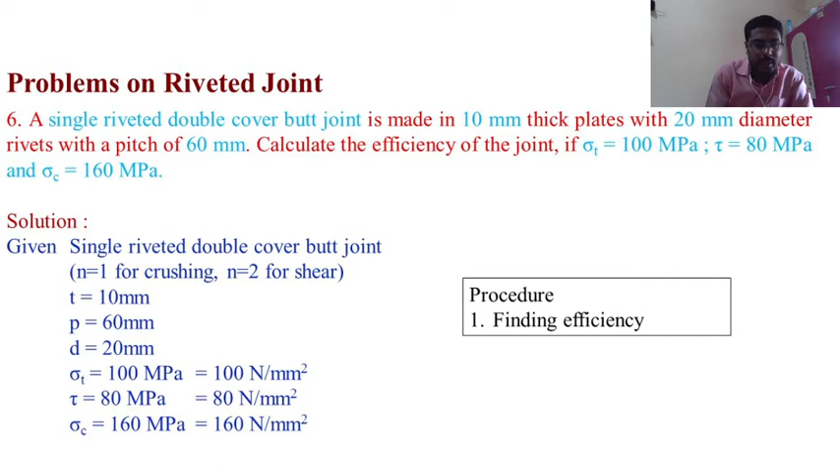So first we find the tearing strength of the joint considering the plate. The equation of the tearing strength is P of T is equal to (P minus D) into thickness into sigma T. This is equation number 5.6b, page 80. So from the data handbook we collected the formula. Substitute all the values to find the tearing strength. Then P of T is equal to (60 minus 20) into 10 into 100. So P of T is equal to 40 into 10 raised to power 3 newtons. So round up the answers. The tearing strength of the joint is P of T equal to 40 into 10 raised to power 3 newtons.

Next we go for the second one, the shearing strength of the rivets. Shearing strength formula: P of S is equal to n into pi by 4 d square into shear stress tau, equation number 5.6d, page number 80 from the data handbook. Note down the equation. Then substitute the values and find the answer. P of S is equal to 2 into pi by 4 into 20 square into 80, equal to 50.26 into 10 raised to power 3 newtons. This is the shearing strength of the rivets.

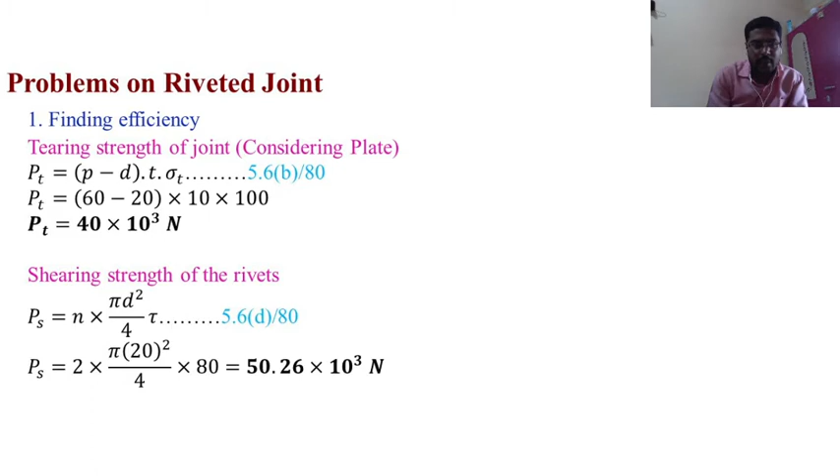Okay, then we finally find the efficiency of the joint. The efficiency of the joint uses the least value among these three values. PT is equal to 40 into 10 raised to power 3, PS is equal to 50.26 into 10 raised to power 3, and the third value is 32 into 10 raised to power 3. So among these three values, which one is least? PC, the crushing strength value, is the least. Therefore we take that into account.

So 32 into 10 raised to power 3 newtons divided by solid strength of the plate, which is 60 into 10 raised to power 3. So 32 into 10 raised to power 3 divided by 60 into 10 raised to power 3 is equal to 0.5333. Into 100, we get the efficiency as 53.33 percentage. So we finally get the efficiency of the joint is 53.33 percent. So this is the solution of this problem.

So if any doubts, any changes, any clarification, please let me know. Otherwise we will go for the next problem.

So problem number 7. Carefully read and listen: what problem is given, what values we get and what we need to find. A double riveted double cover butt joint is made in 12 mm thick plates with 18 mm diameter rivets. Find the efficiency of the joint for a pitch of 80 mm if sigma t is equal to 115 megapascal, shear stress tau is equal to 80 megapascal and crushing strength is equal to 160 megapascal. This is the given problem.

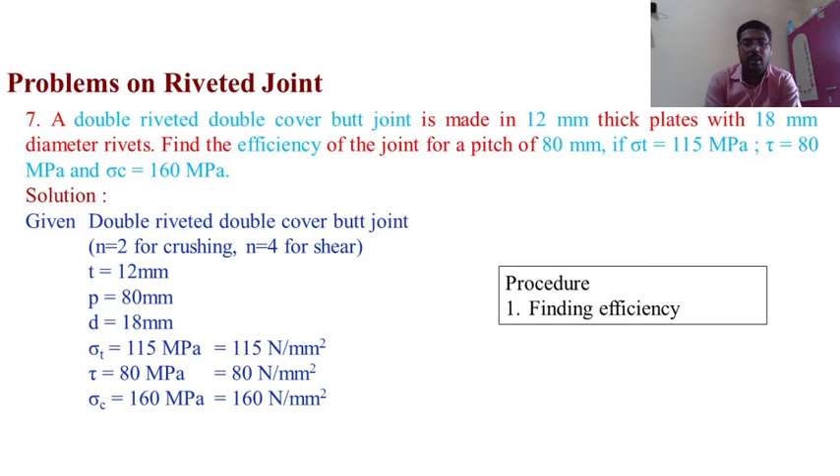So next, write down the given data. Double riveted double cover butt joint: n is equal to 2 for crushing, and n is equal to 4 for shear strength. Thickness of the plate is 12 mm, pitch of the rivet is 80 mm, and diameter of the rivet is 18 mm. Tearing strength is 115 megapascal, equal to 115 newton per mm square. Shear stress is 80 megapascal, 80 newton per mm square. Crushing strength is 160 megapascal, or 160 newton per mm square. This is the given data. We go to find the solutions.

So first, we find the tearing strength of the joint considering the plate. Pt is equal to p minus d into thickness into sigma t. This is equation number 5.6b, page 80, taken from the data handbook. Pt is equal to p minus d into t into sigma t. Then we substitute all the values to find the tearing strength.

Then P of T is equal to: pitch of the rivet is equal to 80, minus diameter of the rivet is equal to 18, into thickness of the plate is 12, into tearing strength is equal to 115. Substitute all the values in this equation and find the value. Then P of T is equal to (80 minus 18) into 12 into 115. Then P of T is equal to 85.56 into 10 raised to power 3 newtons. Round off these answers. This is the value of tearing strength of the plate.

Okay. Next, we go for shearing strength of the rivets. So P of S is equal to N into pi by 4 D square into shear stress tau. So this is the equation 5.6D bar, page number 80 from the data handbook. So write down the equation. Then P of S is equal to N into pi by 4 into D square into tau. So substitute all the values here and find the shearing strength.

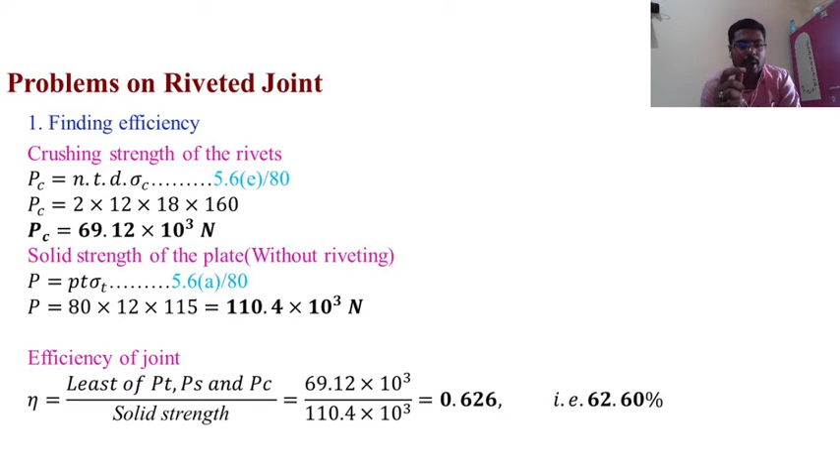Then PC is equal to the formula, then substitute the values. So N is equal to 2, the thickness of plate is 12, and the diameter of the rivet is equal to 18. Sigma C is equal to 160. So therefore all the values substitute: 2 into 12 into 18 into 160. Then PC value is equal to 69.12 into 10 raised to power 3 newtons. This is the crushing strength of the rivets. Round off this answer.

Okay, these are all the three values we get. First one is tearing strength, second one is shearing strength, third one is crushing strength. So all these values we get, and finally find the solid strength of the plate. The solid strength of the plate is without riveting. Therefore formula P is equal to pitch of the rivet into thickness into sigma T. The equation number 5.6a bar, page number 80. So from the data handbook this equation is available. Then we can write down the equation and substitute all the values.

Then P is equal to: pitch of the rivet is equal to 80, thickness of the plate is equal to 12, and sigma T, tensile strength, is equal to 115. Therefore substitute all the values: 80 into 12 into 115. Therefore solid strength of the plate is equal to 110.4 into 10 raised to power 3 newtons. This is the solid strength of the plate without riveting.

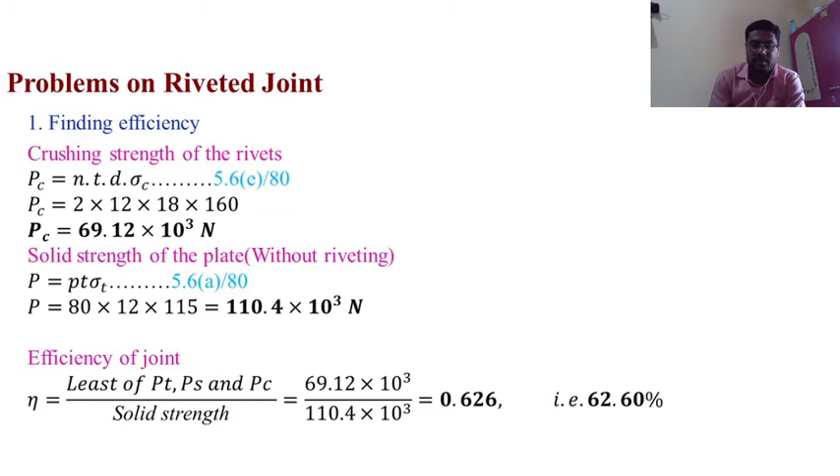So if you have any doubt, ask. Crushing strength, shearing strength, tearing strength, solid strength. If any doubt, you can ask directly, and we will go for the session for MCQ, multiple choice questions. Okay.

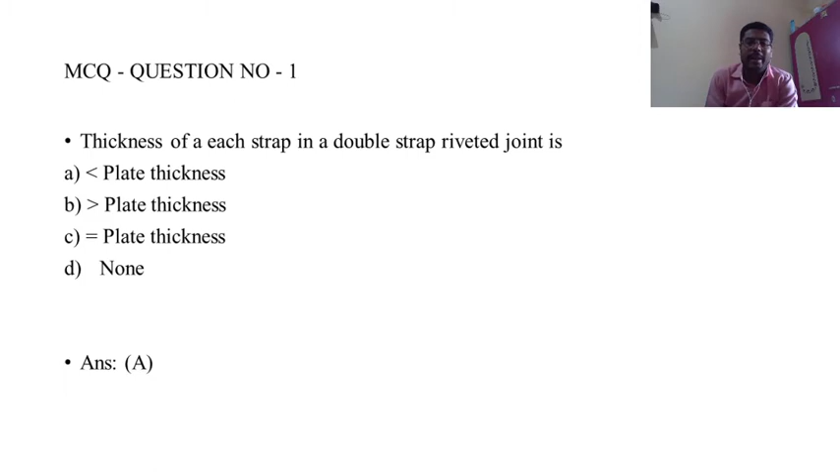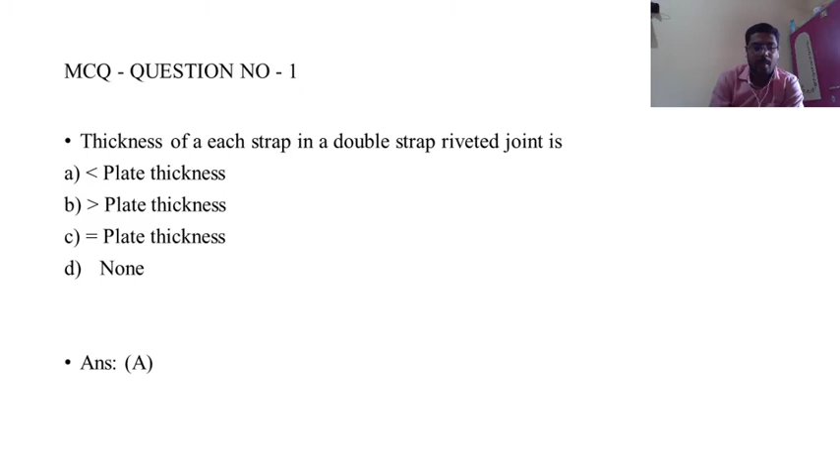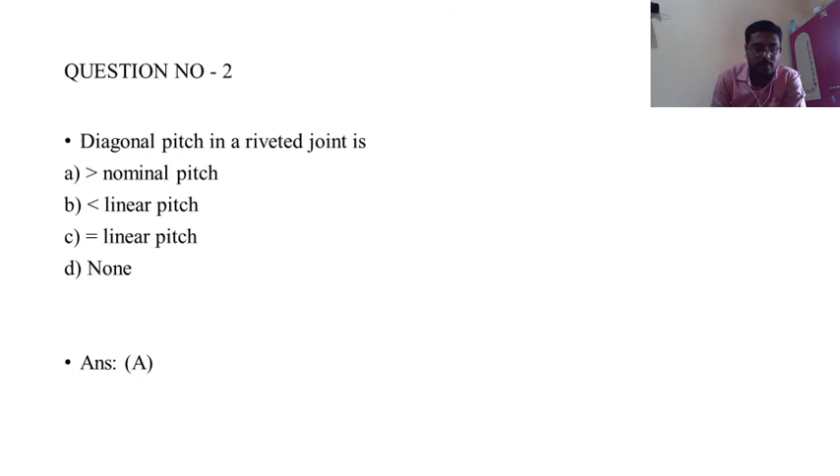Question number 4: Margin in a riveted joint is equal to... I will repeat the question. Margin in a riveted joint is equal to: option A, D; option B, 5 times D; option C, 2 times D; option D, none of the above. Again I will repeat the options. Option A, D; option B, 5 times D; option C, 2 times D; option D, none of the above. So the correct answer is option A, the diameter. Okay, this is the correct answer. So we will go for the next question.

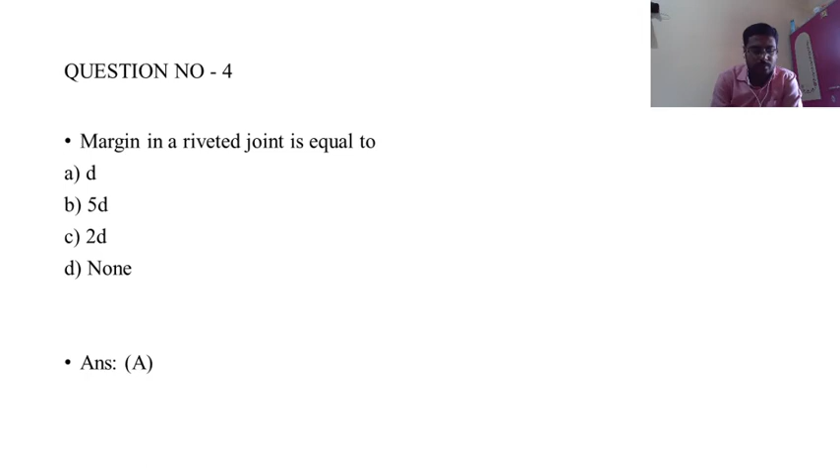So question number 5. Carefully understand the question. Marginal distance in a riveted joint is equal to: option A, 1.3 times D; option B, 1.5 times D; option C, 1.2 times D; and option D, none of the above. Question number 5, so observe carefully. The marginal distance in a riveted joint is equal to: A, 1.3 times D; B, 1.5 times D; C, 1.2 times D; D, none of the above. So answer your questions.

So the answer is option B. Option B is the correct answer. The marginal distance in a riveted joint is equal to 1.5 times D. This is the correct answer.

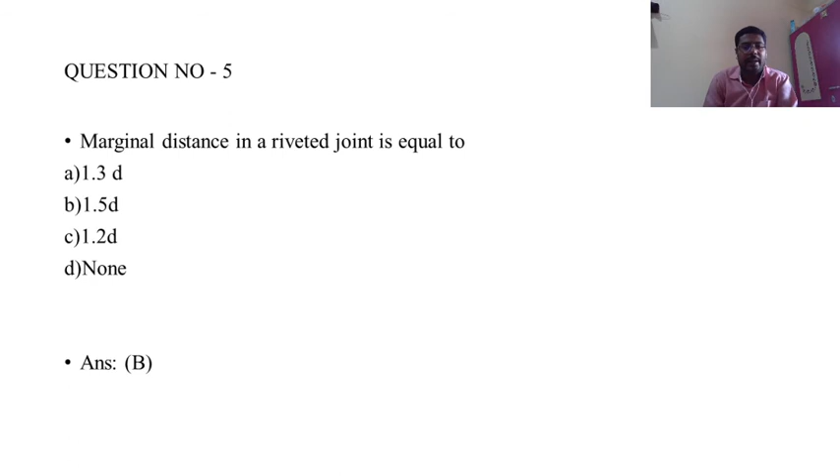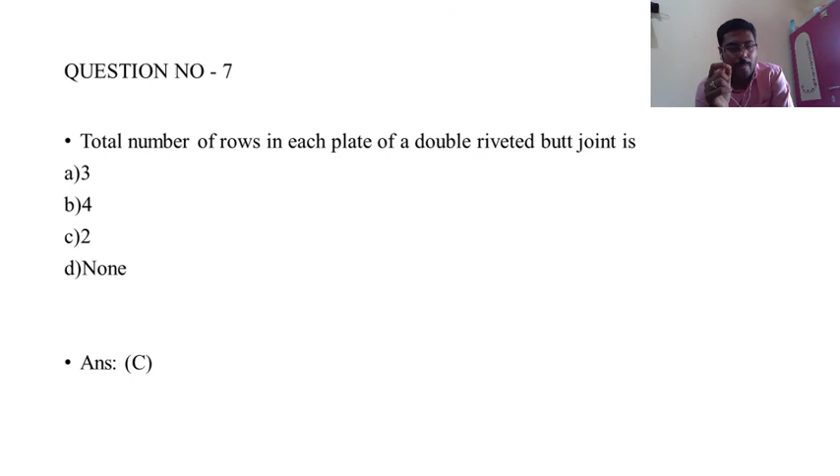The total number of rows in each plate of a double riveted butt joint is. This is the double riveted butt joint. So your correct answer is 2. Option C, the correct answer is 2.

So question number 8. I will read this question. The number of rows in both the main plates of a quadruple riveted butt joint is. Read this question again. Number of rows in both the main plates of a quadruple riveted butt joint is. Option A 4, option B 6, option C 8, option D none of the above. So choose your correct answer.

Number of rows in both the main plates of a quadruple riveted butt joint is. Option A 4, option B 6, option C 8, and option D none of the above. So your correct answer is option C. This is 8. So we will go for the next question.

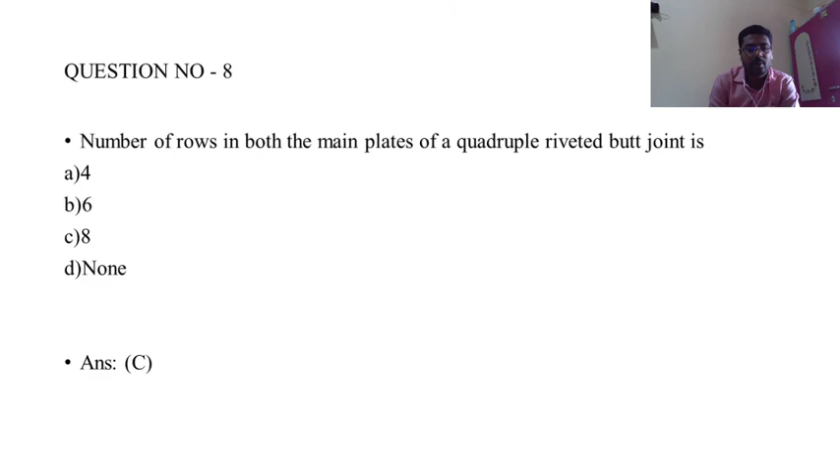Question number 9. In a butt joint, when one strap is used, its thickness varies between dash to dash, where T is the thickness of the plate to be connected. So this is the question.

Option A T to 1.125 T, option B 0.7 T to 0.8 T, option C 0.5 T to 1 T, and option D T to 1.5 T. So choose your correct answer.

In a butt joint, when one strap is used, the thickness varies between dash to dash, where T is the thickness of the plate to be connected. So your correct answer is A. When one strap is used, the thickness varies between T to 1.125 T. This is the correct answer.

So question number 10, this is the last question. If the tearing efficiency of a riveted joint is 50%, then the ratio of the diameter of the rivet hole to the pitch of the rivet is: option A 0.20, option B 0.30, option C 0.50, option D 0.60. So choose your correct answer.

If the tearing efficiency of a riveted joint is 50%, then the ratio of the diameter of a rivet hole to the pitch of a rivet is. So your correct answer is 0.50. This is your correct answer.